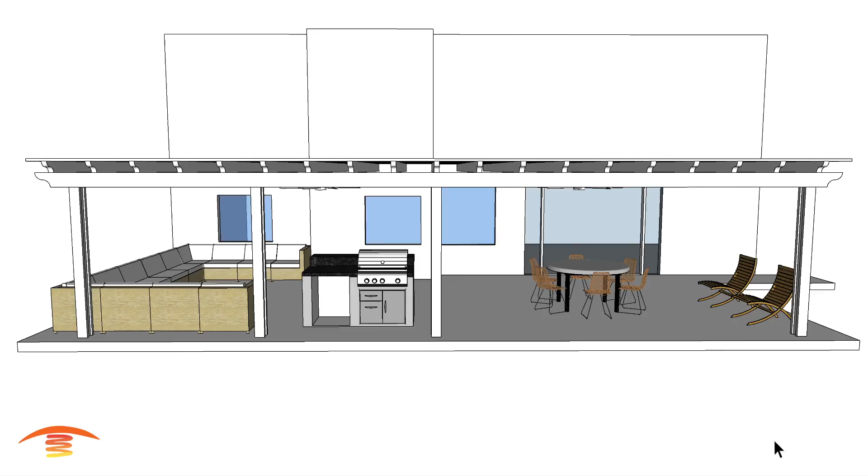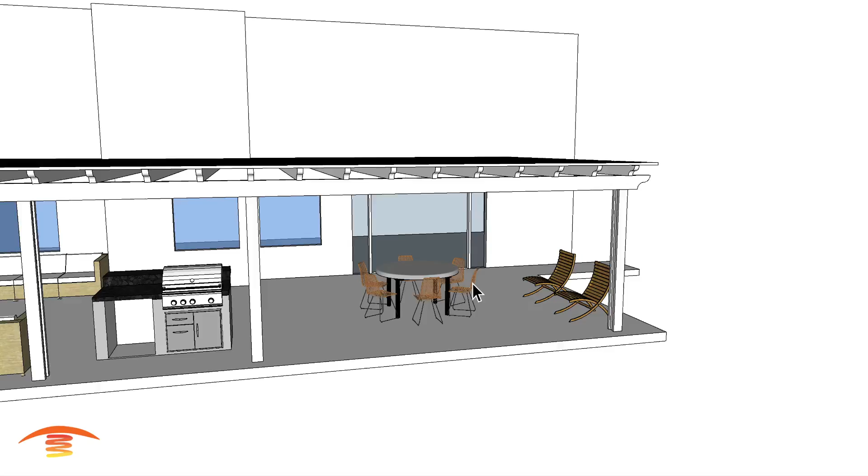And let's get heating. Alright, so we have this patio cover here. It's a residential application. We have a rather large sitting area over here. There's a little barbecue area here. And then we have a dining space here on the right side. These are the two areas that they want to heat, this area and the seating area over here, the dining and seating. Now they do have two rather large fans.

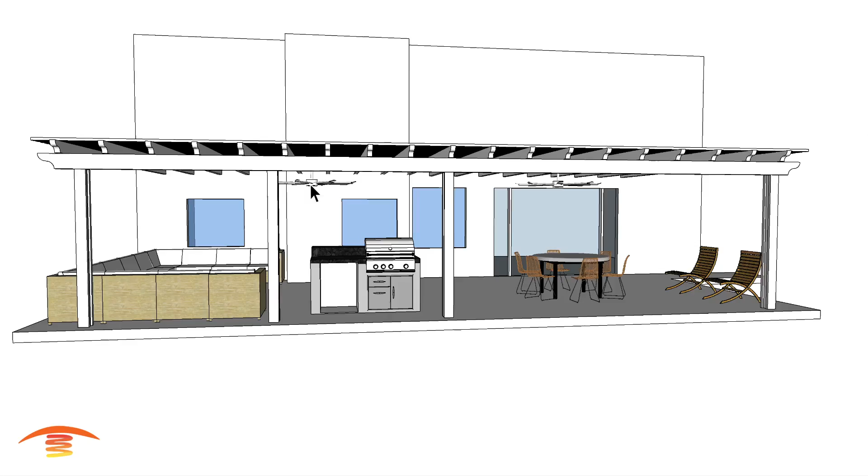I have them centrally located within, well, I shouldn't say centrally located, I just plopped them in there the best I could. Depending on where they're exactly at, it might alter the actual layout of the heaters, so that information is always important to know. Now let's go ahead and look at the overall dimensions I do have.

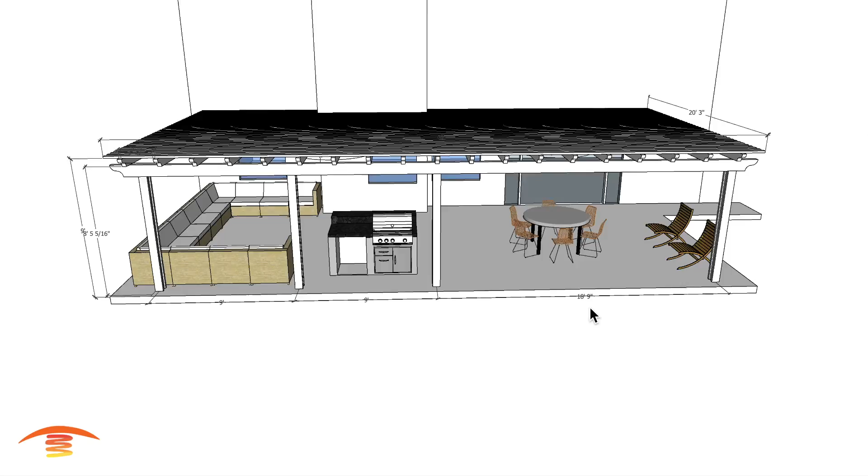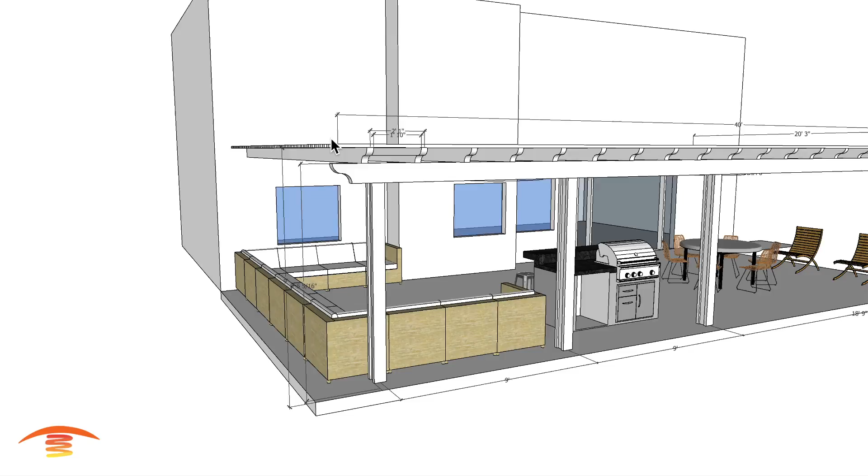And so you can see here, overall dimensions is 40 feet by 20 feet, and this open section here is 19, 18, 9 foot, 9 foot on each post to post. We have an elevation of approximately 9 feet to the bottom of the lattice work up here. And then we have the bottom edge of this beam, top edge of this beam would be 8 foot 5 and 5/16.

Let's see if there's anything else. The diameter of these fans I have at 6 foot. So they're rather large. Now the inner circle that you see here is just an approximation of where that 6 foot diameter might be, so just keep that in mind. It's not exact, is my point.

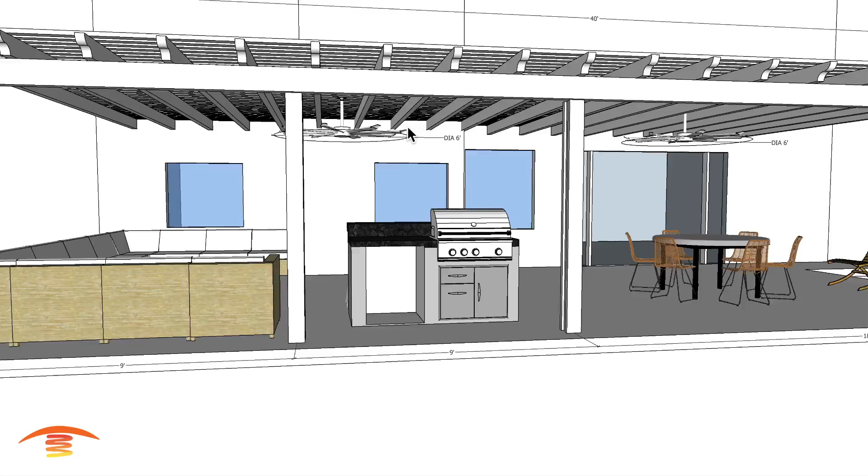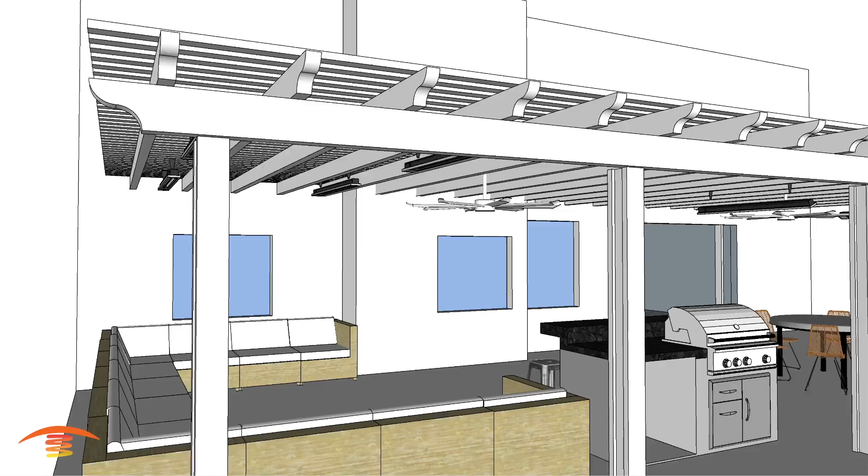Alright, I'm gonna go ahead and turn that off, and there's only really one option I can come up with that would probably look satisfactory in my opinion, and that's using 4,000 watt slimline units. I have 4 on this location over here and 2 over here. And one thing I didn't bring up here before was the clearances that we do have.

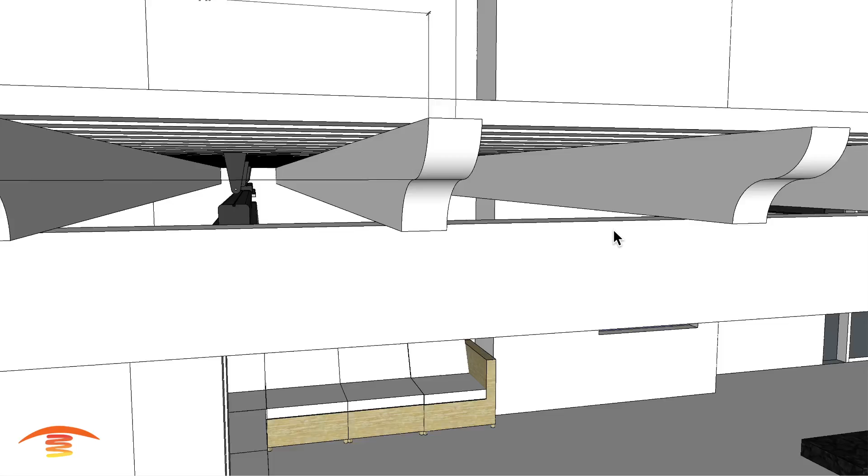So we have an open clearance from this edge to this edge of this beam at 1 foot 10, and then I have them at 2 foot 1 center to center, and that goes all the way down the line, the same opening of 1 foot 10. So looking at this, we're going to go ahead and turn on the clearances to combustibles. I'm going to turn the dimensions off right now.

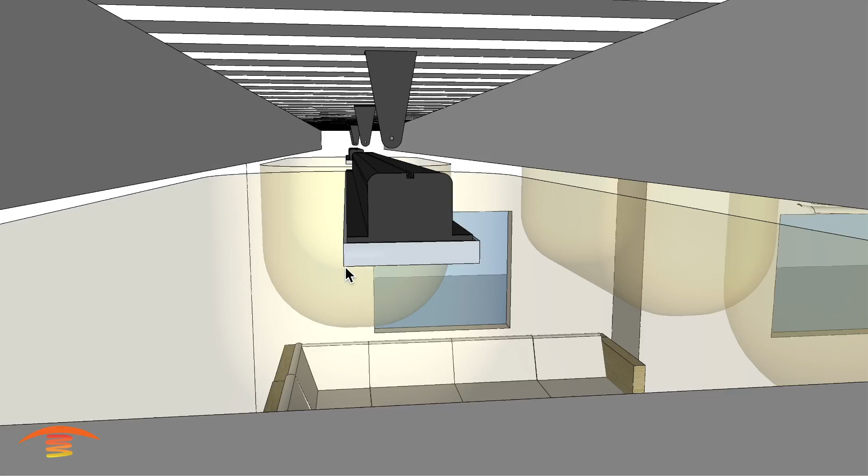So with this height that we had talked about, we have plenty of clearance below the heater, because the heater mounts up on the lattice work up here, and then the heater comes down to about, I think it's 9 1/4 inch from top to bottom. And you can see that we have no problem with the clearances below the heater itself. I have it right up to this edge here.

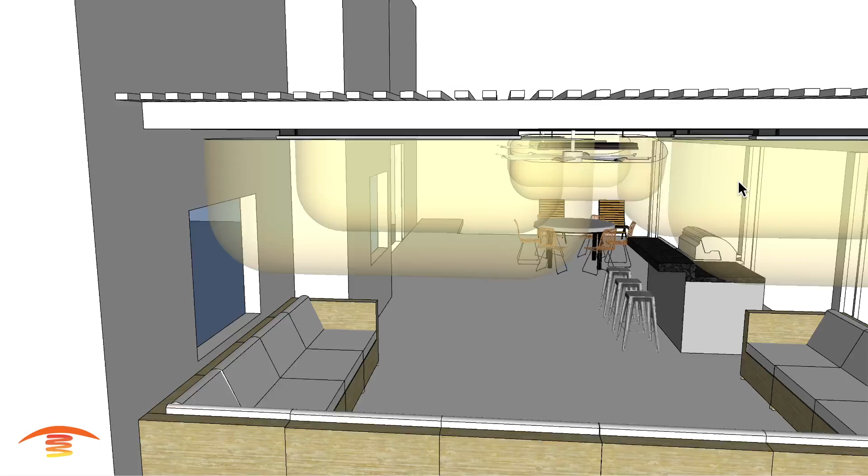18 inches from this edge to the beam coming across here, and then same with, I shouldn't say same, actually. I have it at, I think it's 9 foot center to center. Let's go ahead and pull that up real quick. Let's see here. It could actually be 10 foot because of the length. Yeah, there we go. 10 foot center to center on the heater, and that's true with these two groups here.

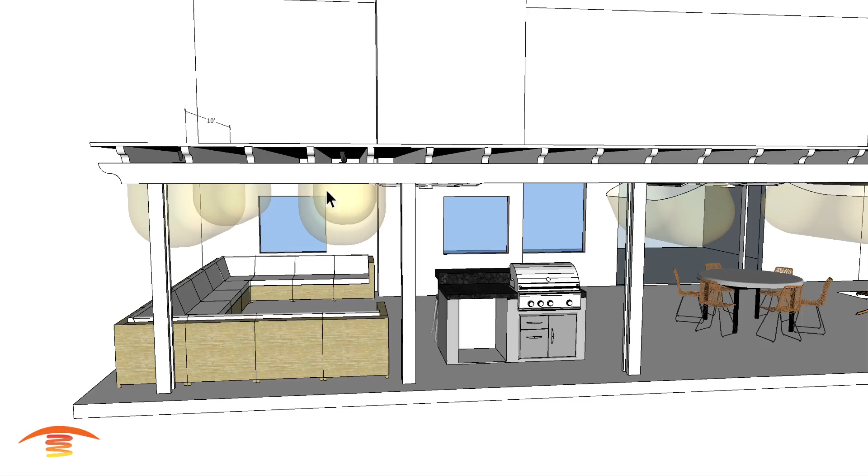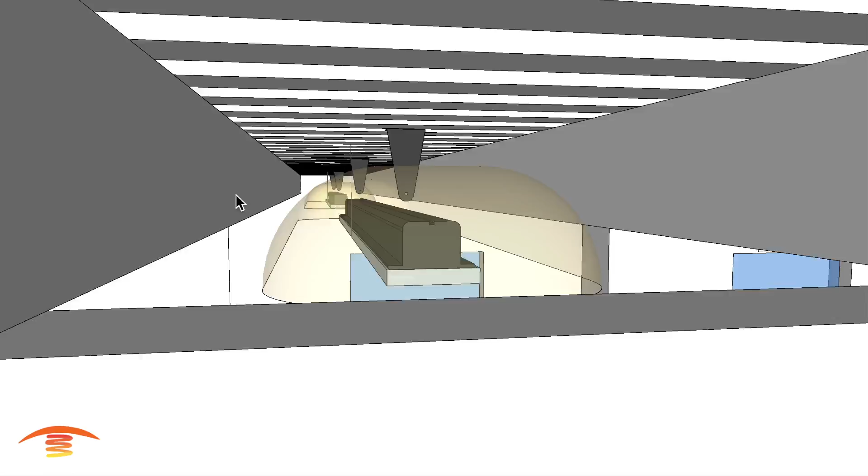Looking at the clearances above the heater, you can see when I place them up in this little area here between the beams, there's no problem with clearances on the left or clearances on the right. The OEM bracket will maintain that 6-inch clearance above, so it's 6 inches from this edge here to any combustible surfaces, and 6 inches from that edge, as well as here across, and all the way up 6 inches. So you can see no problem with clearances.

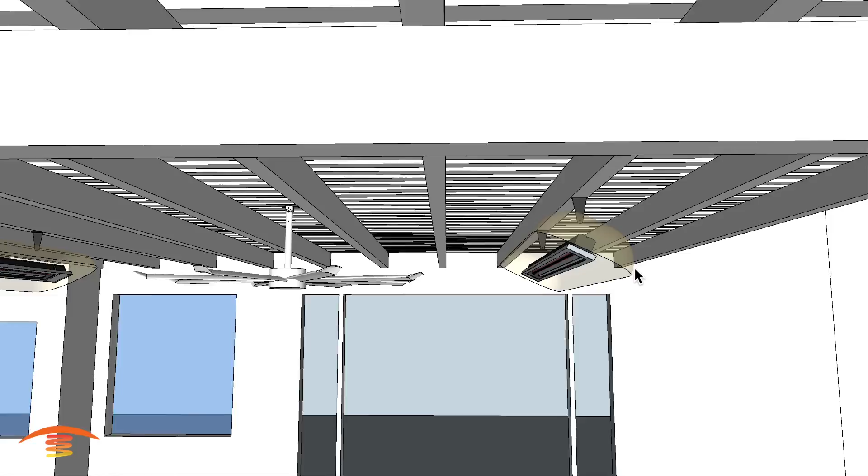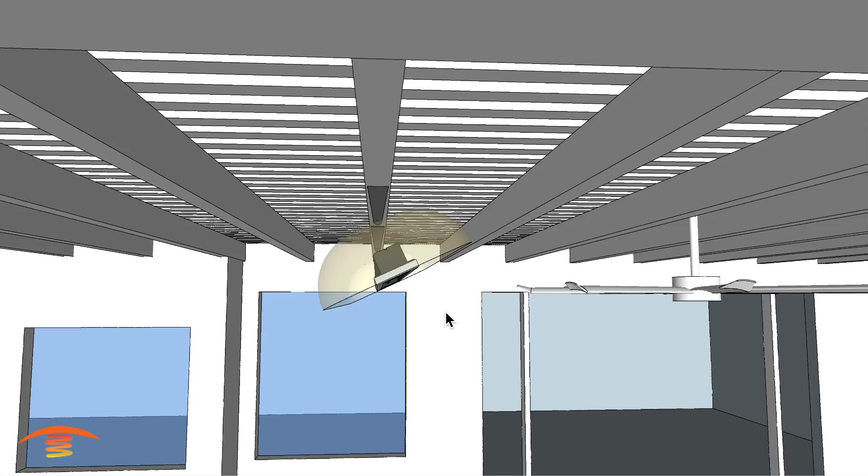Looking over here real quickly, same issue. No issues with clearances. I do have them rather oddly placed. I'd have to look into that a little bit. Sorry about that. But yeah, the brackets are a little bit off there. So I'm not quite sure what happened on that model, but I'll figure that out. And in any case, I may have lowered them based on the height of this, but I moved this up, so I'll have to look into that. But the placement is going to be the same.

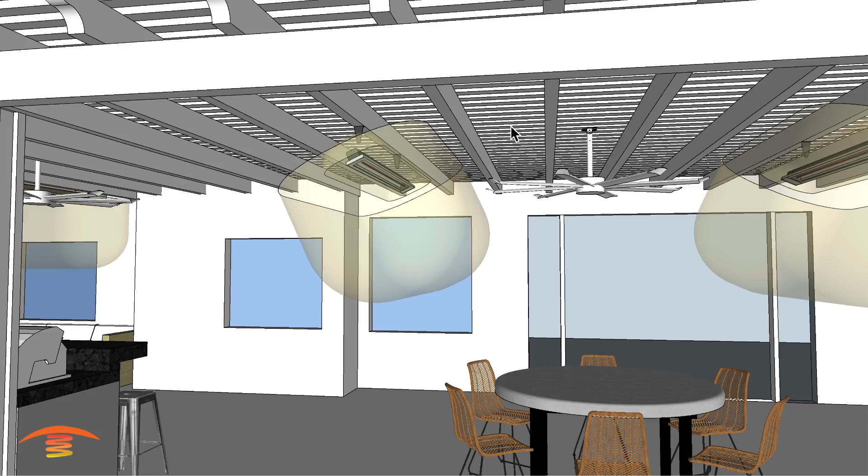In any case, let's look at the clearances below. Sorry, here. Clearances below the heater. You can see with the placement of the heater on this beam in the center of these two beams, I should be okay with angling this heater out at 30 degrees and not penetrating the clearance issue with regards to the fan blade itself at 6 foot in diameter.

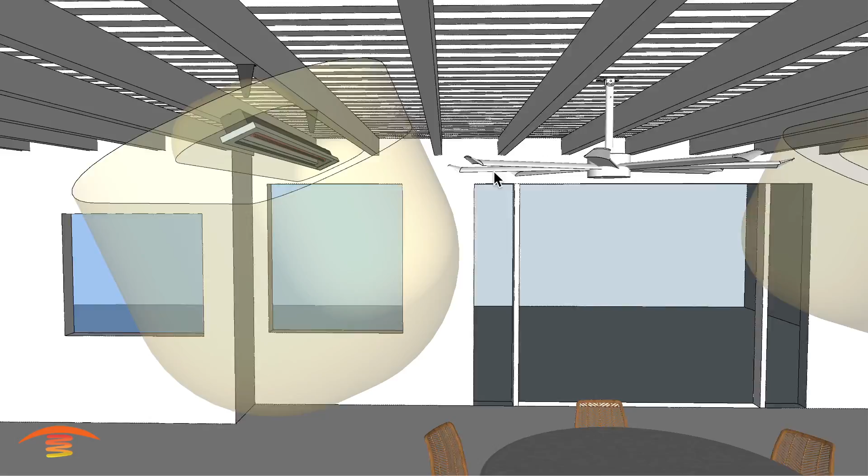Now, these fan blades could be steel fan blades, and if that's the case, they're non-combustible. And where you wouldn't want the physical ray, this would be the physical ray coming off the heater, penetrating any type of light material, let's say aluminum or something like that. The clearances to combustible could be within that realm, so you could actually move the heater in a little bit if that's feasible.

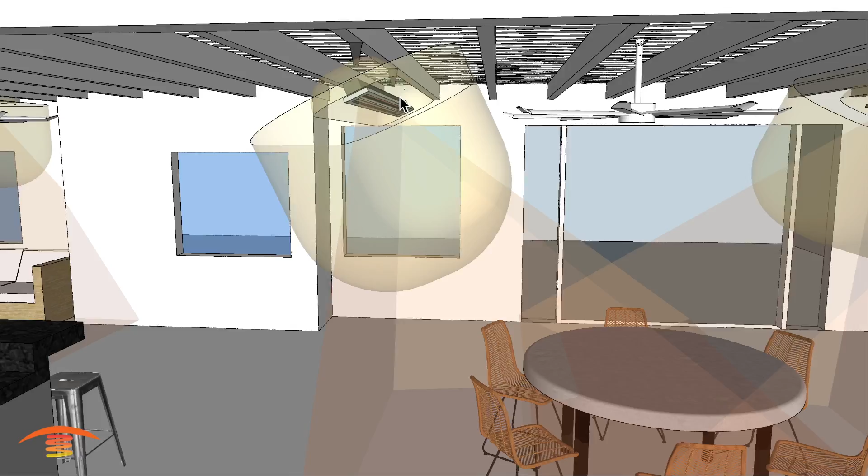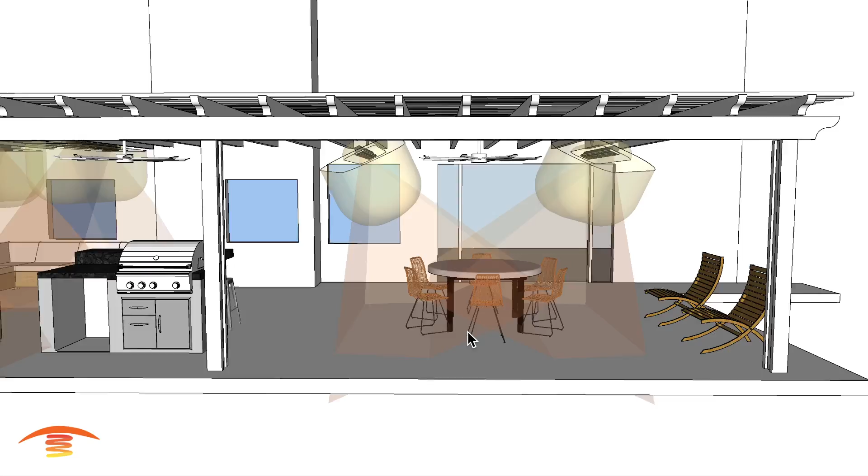Now, placing it over here, and I'll just use this as an example, changing the angle would cause an issue with regards to the clearances down here. So we only have a few more degrees that we can actually change the angle upwards to keep the ray penetrating the center area here. So we wouldn't go with the 30 degrees, maybe just a 5 degree or something of that nature, and not make contact with this here and the beam itself if we were to place the heater between here.

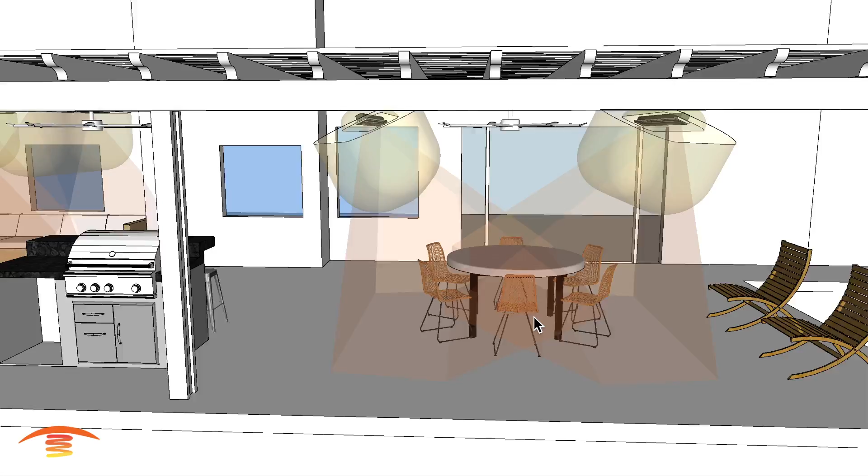If we point the heater straight down, the distance apart from each other won't give you any coverage in the center. So that's why I'm doing what I'm doing here, and hopefully that makes sense. So you can see here we have a good coverage of the table, and over here we have plenty of coverage throughout this whole span.

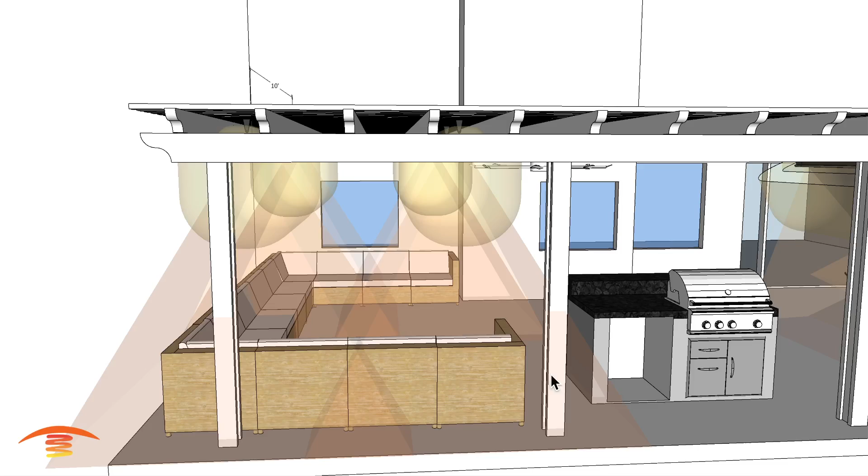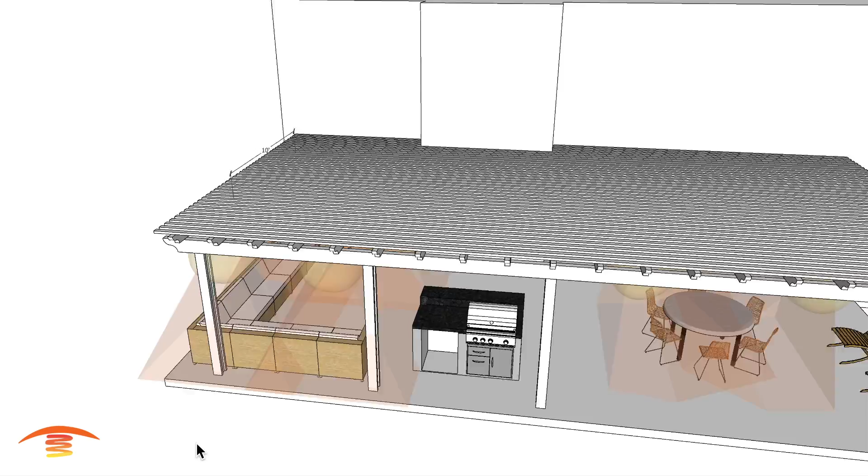Now, I did start the heaters here based on the fact that the seating was at the outside edge, and moved into this post here, and that's why I brought up that 10 foot section. So we're probably doing something close to 11 to 12 feet from this edge here out to this edge here. But with that, we're getting very good coverage all the way across here. I'm not sure if you can see all that, but that would be what it looks like over there.

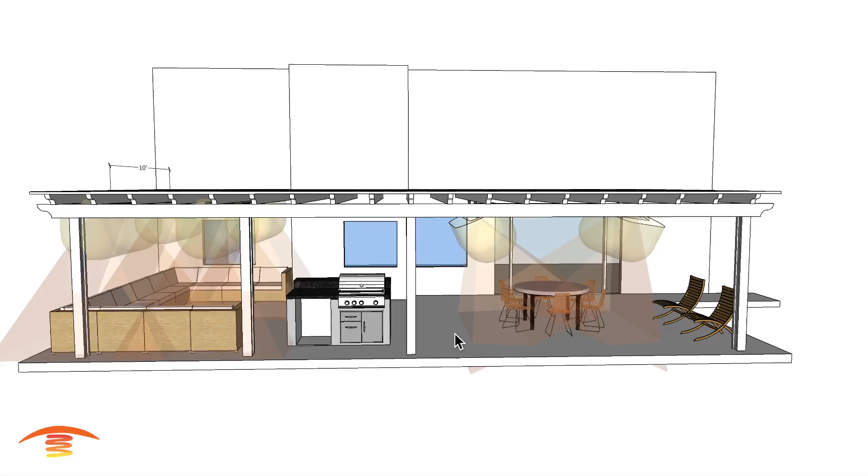And then again over here, we're just heating up this space right here. If you wanted to heat up the whole area like I did over here, you'd have to do something similar to this in order to make that whole area warm. And it may be more than 4 units, it might be 6 units over here if you wanted this whole space warmed up. So, all right, well, I hope this has helped.